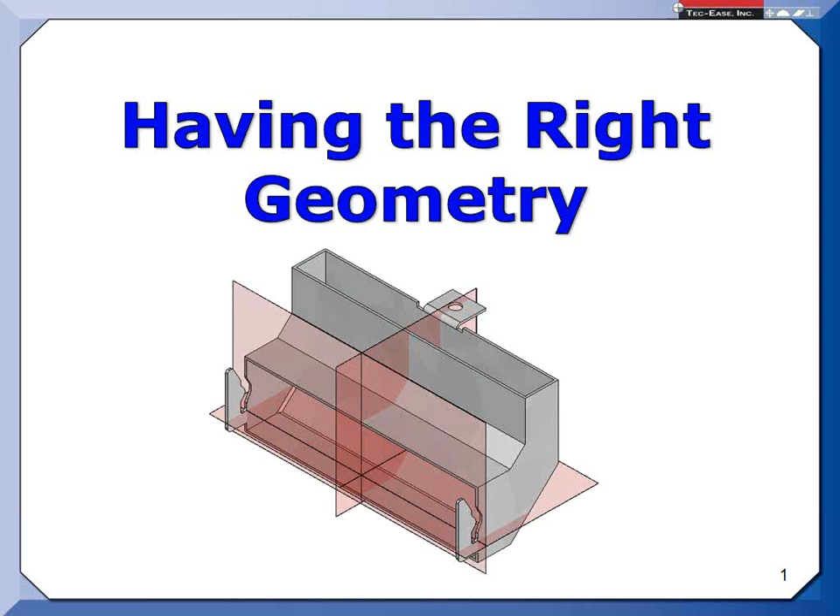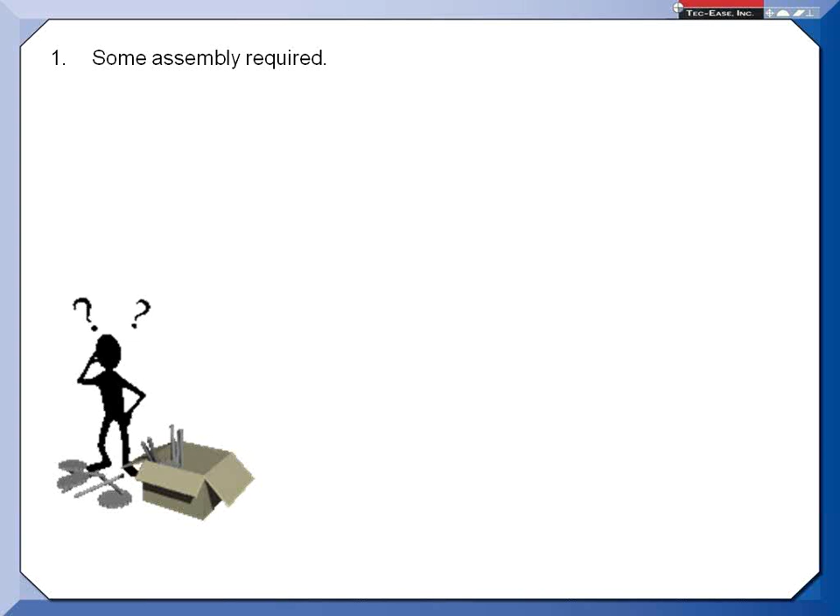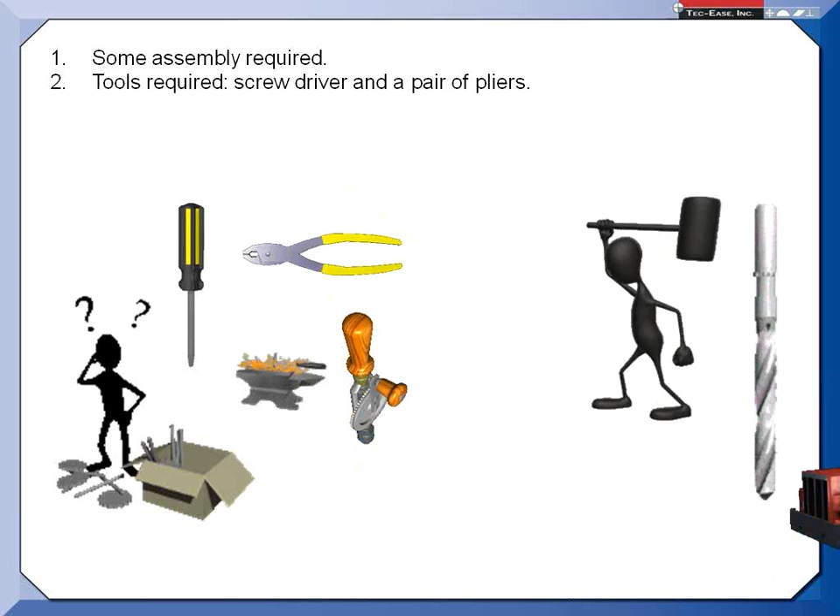Whenever I think about having the right geometry, I think about those things that I buy that come in a flat box and they have those lies on the outside. You might be familiar with those. The lie number one is usually some assembly required. And when I see that, I know there's going to be a whole lot of assembly. And then it'll often say tools required, something like a screwdriver and a pair of pliers. And that's fine, but they fail to mention that you're also going to need a hammer and a drill and maybe a bigger hammer and drift pin and maybe a bigger drill and, I don't know, a cement mixer. They leave out some of the tools you may need to put it together.

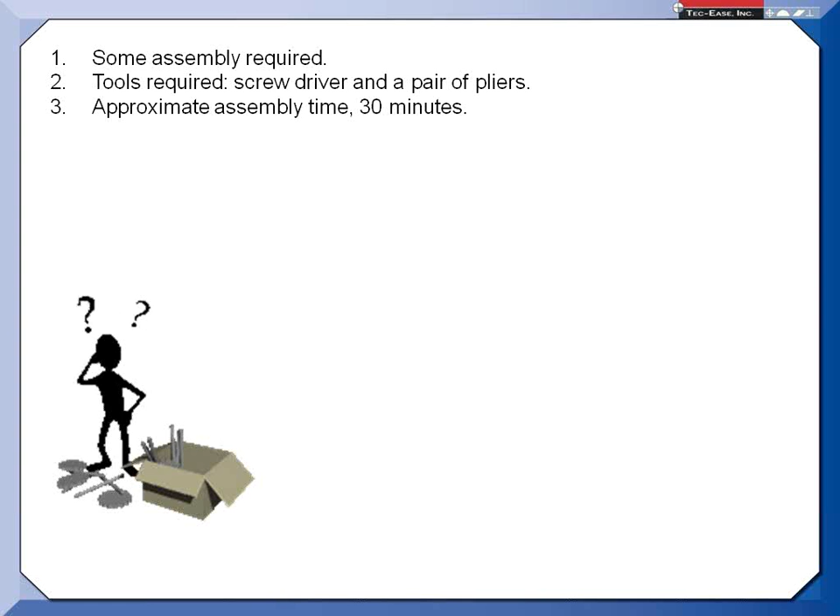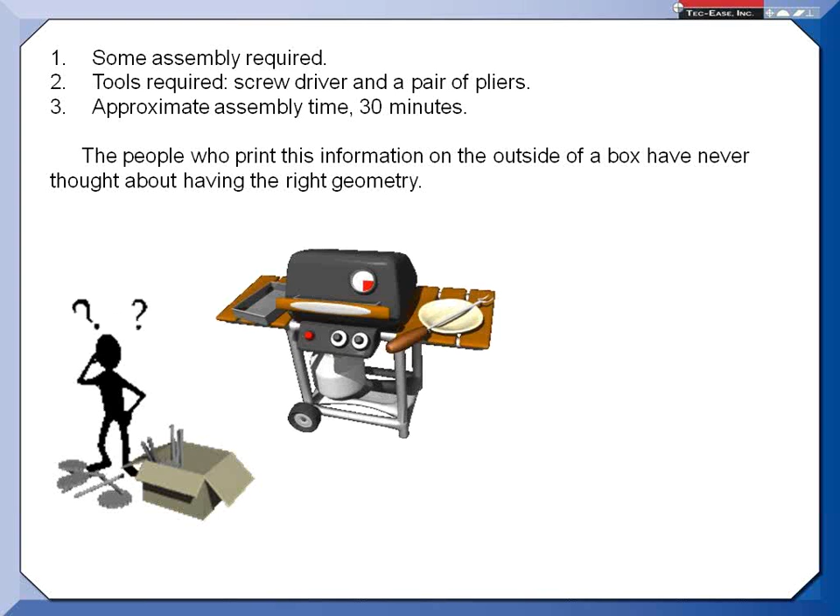And then they say approximate assembly time, 30 minutes. I can remember being suckered in on that with a kitchen set one Christmas Eve for my daughter. I started putting it together at about 11:30 at night, thinking midnight, I'm in bed, being an engineer and all. Well, the next morning, after spending several hours through the night, I had to say, oh, honey, look, Santa didn't have time to finish putting it together, so Daddy will have to do it today. I firmly believe that the people who print this information and design these things have never thought about having the right geometry. If you've ever dealt with putting together a gas grill, any sort of exercise equipment, you know what I'm talking about.

Then there's an instruction when you open up the manual, and the instruction says, do not tighten any fastener until fully assembled. The trouble is, many times, once it's fully assembled, you can't get at a lot of the fasteners to tighten them. I just went through this with a workbench. It had a drawer, and the track for the drawer was bolted onto the sides of the workbench. And the instructions said to close the drawer and line it up so you had a nice uniform gap all the way around the drawer, and then tighten the screws for the track. Well, when the drawer is closed, so you can get that nice alignment, you cannot get to the nuts that go on the ends of the screws. So you may have experienced something like that.

And I just want to say that there's been a lot of emphasis over the years on using maximum material condition on things like holes that are for assembly. And that's good. It makes it better for production. But oftentimes, in order to put everything together, you have to follow this instruction. You have to leave things loose and float them around to get everything to locate.

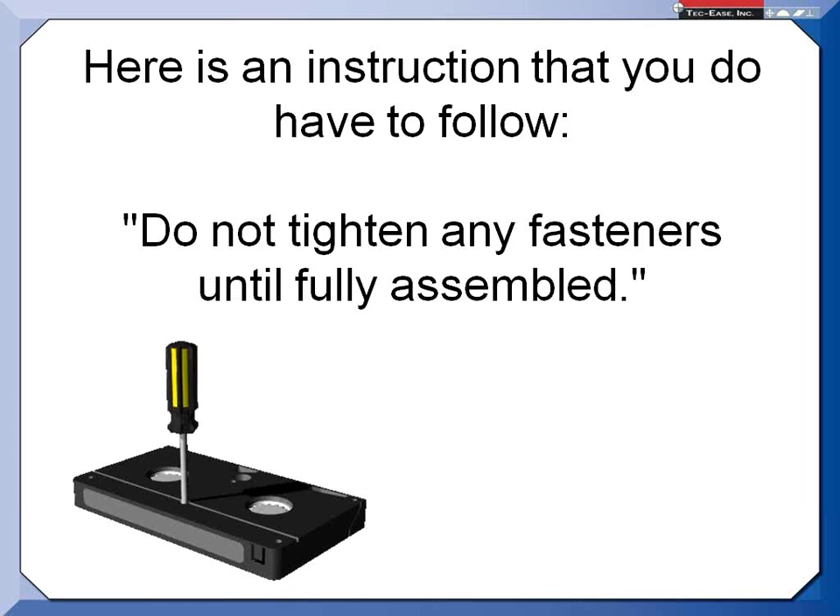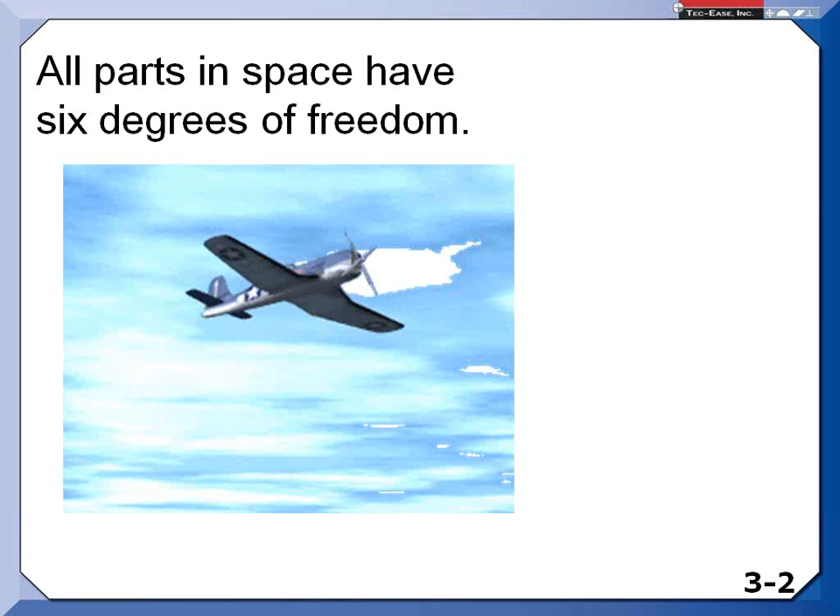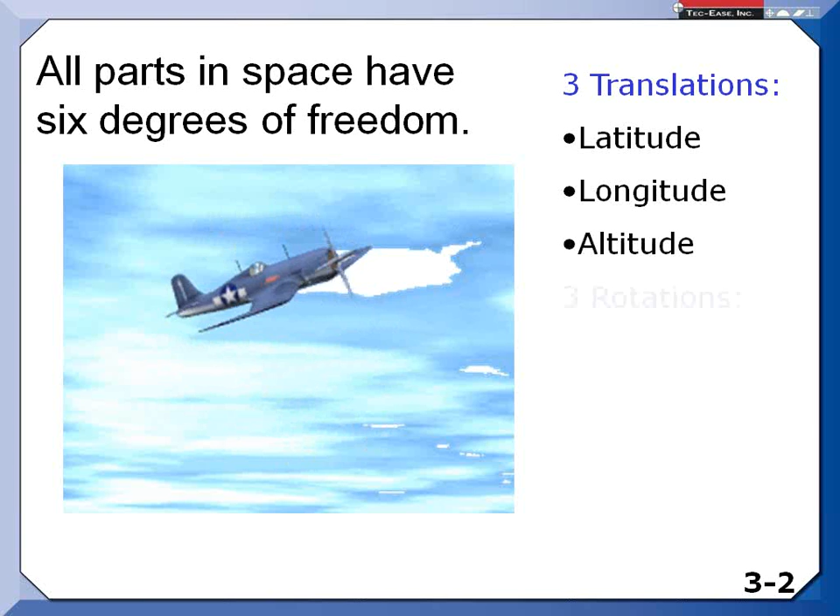Now, from your fundamentals training, I hope everybody knows that all parts in space have 6 degrees of freedom, whether we're talking about an airplane or some machine part or molded part. We have the 3 translations, or I'd say they're the 3 tudes: the latitude, longitude, and altitude. Those are our 3 translations to find out where that plane is. And then you have 3 more tudes. They're the attitudes, and those would be pitch, roll, and yaw.

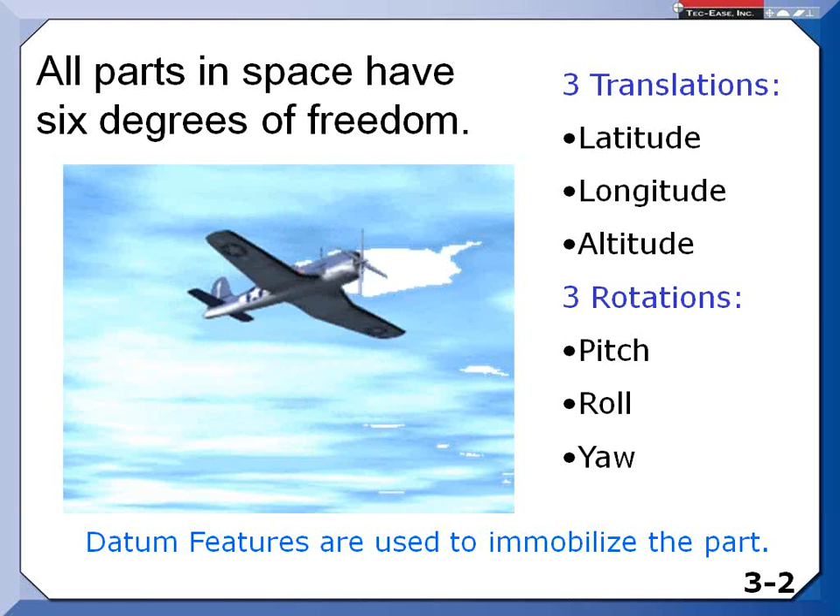Well, on a part, we use our datum features to immobilize the part, partially or totally, so that we can inspect it. And so that's what I want to talk about today: how do we immobilize the part? How can we do it with what's known as exact constraint? If you can fully immobilize your part on the 3 axes, so you've taken away the X, Y, and Z translations and the 3 rotations about those axes, that is known as exact constraint.

Many times when I'll look at a design, I'll say, what locates this part on the mating part? And people will tell me that it's going to hit here, here, here, here, here, and here. And I say, whoa, wait a minute. You're expecting it to hit in too many places. That's not going to happen. You're trying to get over constraint. And if you're dealing with a real flexible part, over constraint isn't always a bad thing.

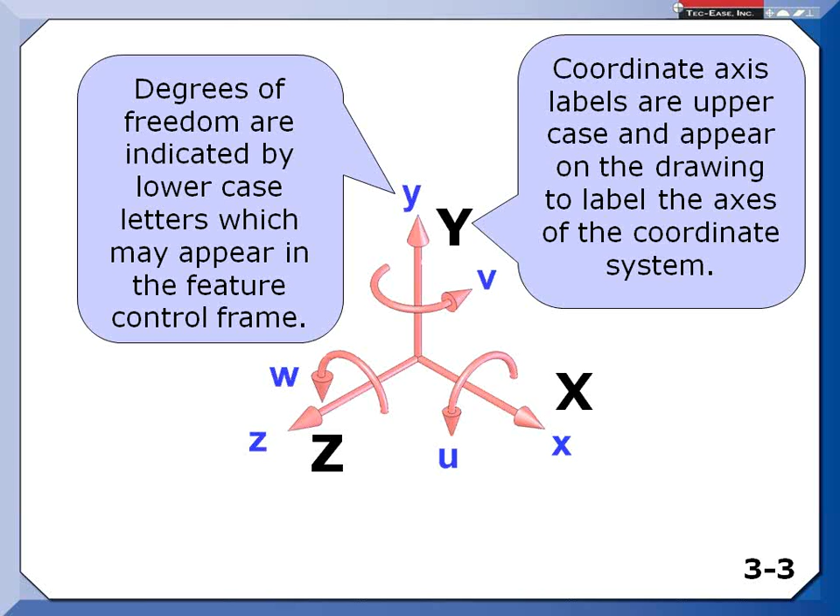But on the more rigid parts, if you try to get over constraint, you might end up pulling the machine apart. I know there was a company that was building copiers, and they had over constraint; when they ended up tightening up the bolts that held the main engine, they called it, in the copier, they were actually trying to rip the thing apart. So if we can constrain or arrest all of these degrees of freedom, then we get this thing called exact constraint.

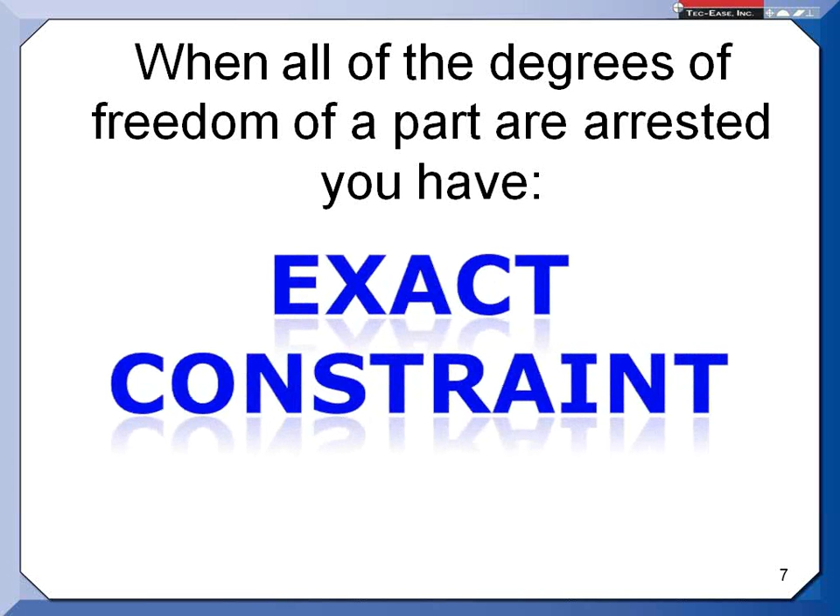Now, when I look for guidance in the Y14.5 standard, I look under the section with datums. The standard doesn't have a lot of application, but in this section they tell us how we should pick datum features. But I get a little confused by the guidance that they give there. The standard says that functional relationships to the toleranced features and the requirements of the design should be taken into consideration. Well, that's cool. I'm good with that.

But then it says to ensure proper assembly, corresponding interfacing features of mating parts should be selected as datum features. Well, there's a whole lot of parts that mate that shouldn't have datum features where they mate. You may have some frame, and then you have a lot of other little components or parts that mount to it. You don't necessarily have to create datum reference frameworks where each one of those little parts mounts.

I know there's some companies that do, but every time you set up a new datum reference frame, it is a new setup and inspection. Every inspection has error or uncertainty of measurement. So sometimes there's a better way. The standard goes on to say that you should be able to get to your datum features. They have to be accessible. I'd agree with that. They have to be of sufficient size to permit their use. Now, what is their use? Well, their use is to constrain some degrees of freedom. If they're too small, they can't do a good job of it.

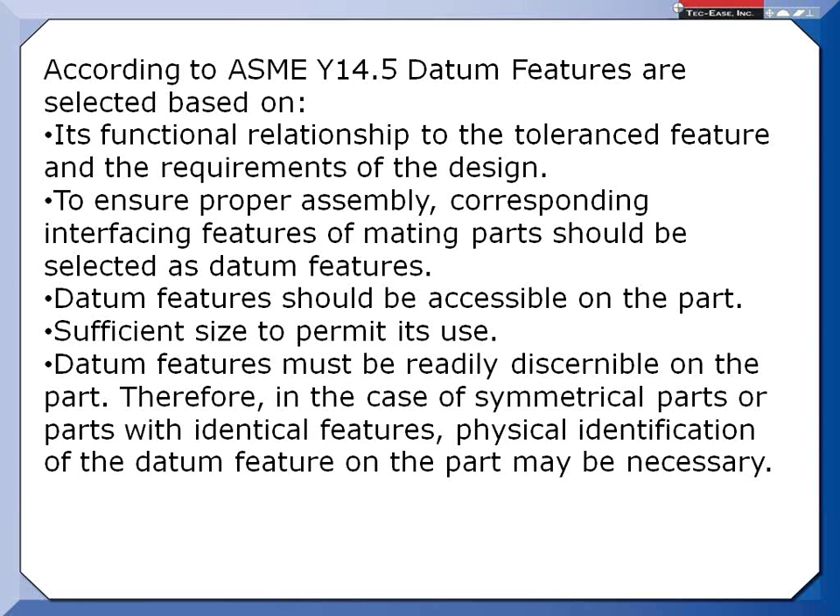Well, I'd like to show you a few case studies and how things were changed a little bit to do a better job. This is a case study of a cover. This cover is used to mount onto a casting, and there's flammable liquid underneath the cover in this area and this area.

So they had this position tolerance on the 8 holes, and it was a die-cast part. But they wanted the cover to align using these screws. So they had the 8 screws going in there in assembly, and they had a dedicated machine to drill and ream these holes. Now, the problem down at assembly is they had to start all 8 holes and then go back and tighten them. If they drove a screw right away, the cover might have been shifted off so you couldn't get some other screw in there.

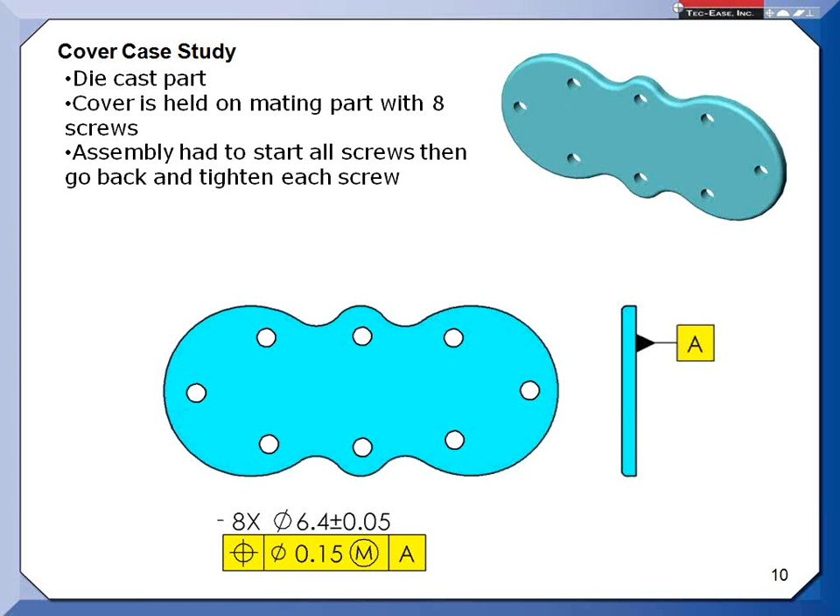So here's that instruction, once again, that we find in that manual. Do not tighten until fully assembled, then go back and tighten. So the holes were drilled and reamed on a dedicated machine. My goal was to get rid of that dedicated machine. They wanted the holes to do a good job of locating the cover. And I asked the designer, which of the holes here does the locating of the cover? And he said all of them. That's why we drill them and ream them.

Now, if you're worried about a shear load, if this was a brake pad and you had 6 or 8 rivets and you're worried about shear load, yeah, you'd have to really hold the location tight so they all carry the shear load at the same time. But many times, as with this cover, those screws were just there to clamp once the thing was aligned.

Now, keep in mind, if I put position tolerance on those holes, from part to part to part, those holes are moving all over the place. If I ask really what holes are going to locate this cover, it's whichever 2 are the farthest out of location. They're the ones that will hit the screws first, and then hopefully the rest will clear.

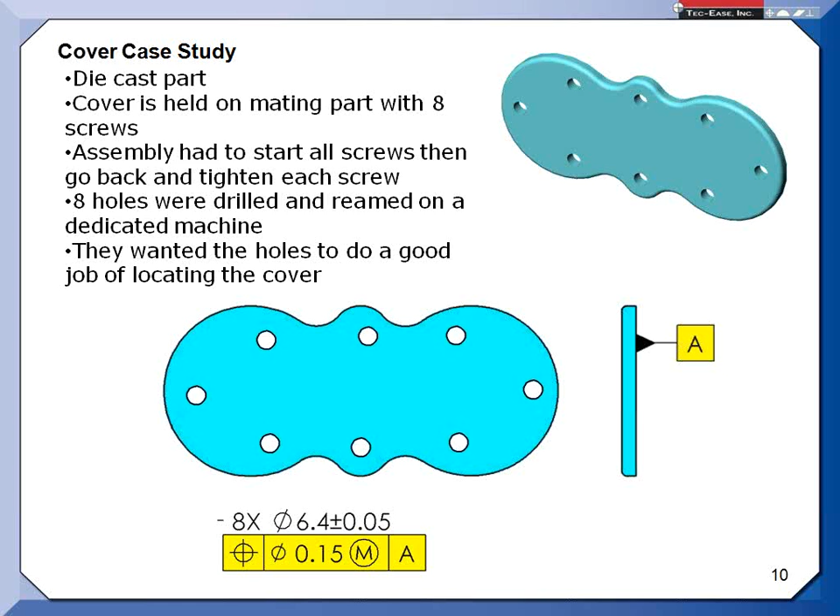If I were to ask you, which of the holes on this cover would you like to use to locate it, what would you tell me? Probably the 2 horizontal, farthest left, farthest right. Yeah, the ones that are the farthest away is usually what people say. But even if I put position tolerance on those 2 holes, they're moving around. And so I have to open up these holes bigger than I'd like to because of the position tolerance in order to make sure I can get the screws through there.

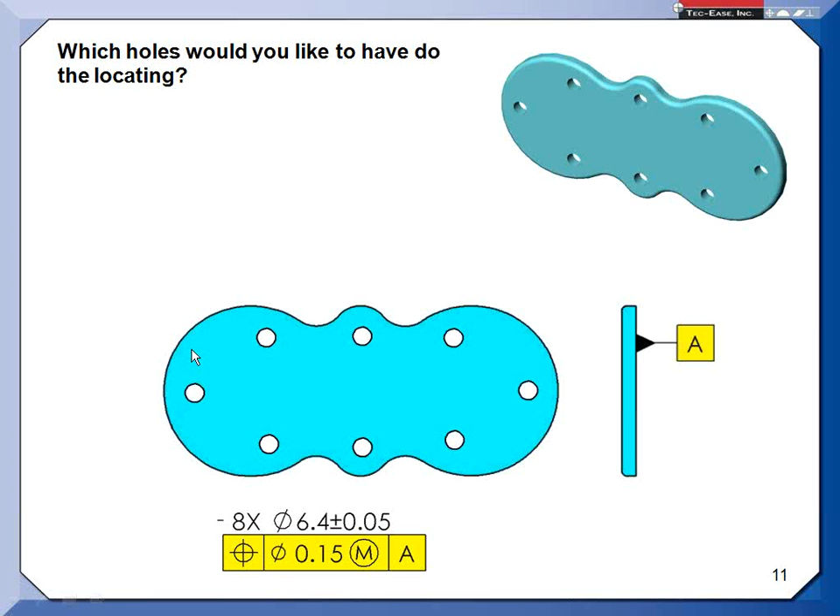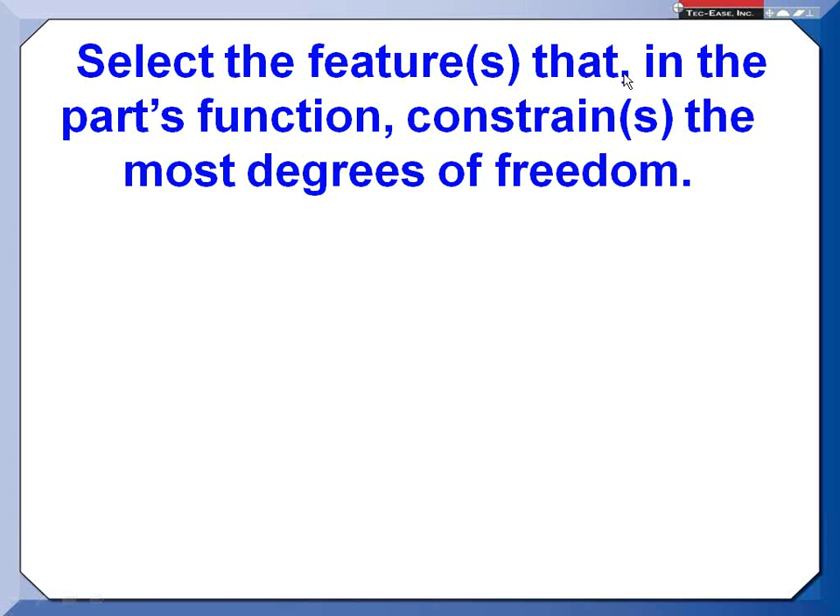So I talked to tooling, and I asked them how well they could hold the size of the holes. And I also asked them a little bit about other things like orientation of the holes. What I like to say is when you're selecting your datum features, you should select the features that in the part's function constrain the most degrees of freedom. If you do this, you'll end up with less variation in your assembly, and so that's the approach I took on this cover.

Something to keep in mind is I don't care what process you study. If you look at the 4 major characteristics, location, orientation, size, and form, the one that requires the most tolerance is location. The one that requires the least tolerance in your manufacturing process is form. Let's think about it for a machining process, for instance. The form comes mainly from your speeds and feeds, perhaps in like a milling operation. When you go to the size, that often depends on the size of your tool and your speeds and feeds. So you're getting a little more involved there.

By the time you get to orientation, that's how well you squared up the column on your mill and your bed and the travel and all that. So you're getting into that, and you're also getting into the speeds and feeds in the tool. It's all part of that. And when we talk about where a feature is that you're creating in that process, now you're into all the dynamics of the machine. So study after study tells us the most difficult thing to control in a process is location, followed by orientation, then size and form.

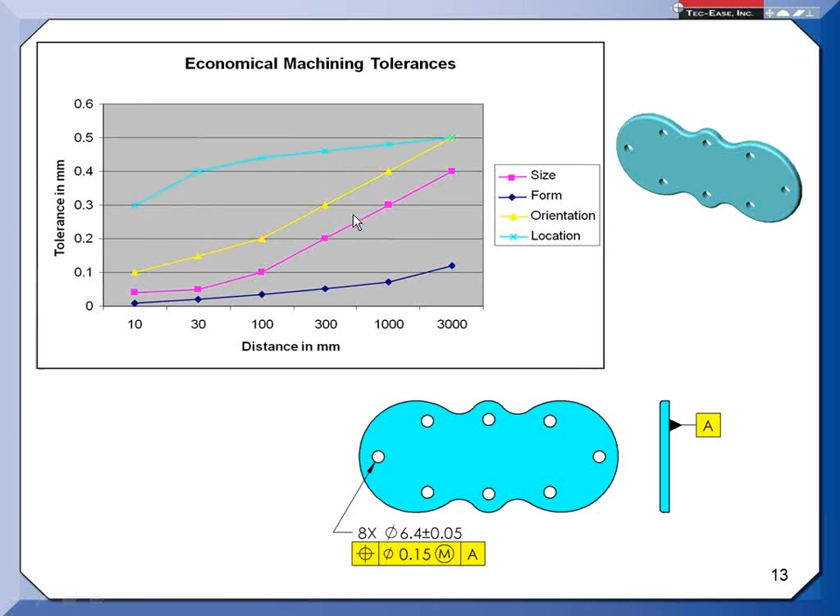So keeping this in mind, if I can somehow take position out of the equation when I'm locating the part using these features, I could use tighter tolerances for orientation and size. So what I did is I recommended that they make one of the holes a smaller hole close to the size of the screw, and a slot at this end. Now the length of the slot was calculated so it never peeks out from underneath the head, so the customer won't know there's a slot there.

But what this did is it takes that variation in position out of the equation. Instead of both holes trying to locate this part, only the one on the left is going to control the location. And then if I were to ask you, what is the relationship of this hole to the plane established by datum feature A, what would you tell me? Is it location, orientation, size, or form?

Michael, you were right. It's hard to get response when you're doing a webinar. Yes. Ask the question again, Don. Sure.

Orientation. There it is, orientation. My question was, what is the relationship that I need to control between this hole and the plane established by A? And the answer isn't where it is, because it's going to become my datum feature B. It's going to become my origin of measurement. So the relationship is just orientation, in this case, perpendicularity. And so I can hold that perpendicularity very tight and still not add cost to the part. You kind of get it for free with your process.

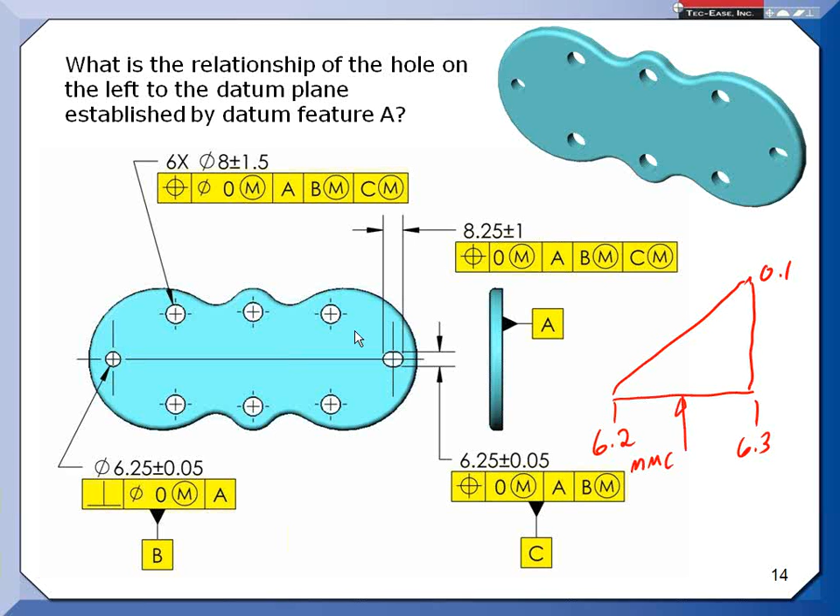I will say sometimes people say, oh, a slot costs more. Well, if it's in a CNC machining center, it's called a G01 code, which is a linear move to create a slot. And in sheet metal, in castings, in molded parts, it's free. You're not going to pay extra at all.

So at the end, what we accomplished was we were able to use these parts as cast. I got rid of that dedicated drilling and reaming machine, and we're actually locating the part better as cast. Tremendous savings in cost on the part.

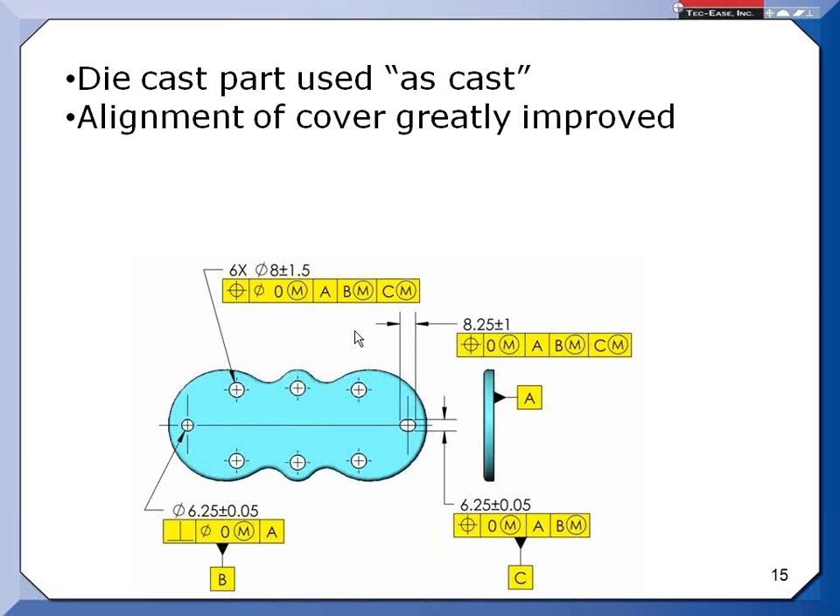Also, the alignment of the cover was greatly improved, and assembly was able to put the screw into datum feature B first, then into datum feature C, and then we just came out with some order of putting the screws in that made sense, but as soon as they put the screws in, they could drive them home. No more leaving everything loose and then going back and driving the screws.

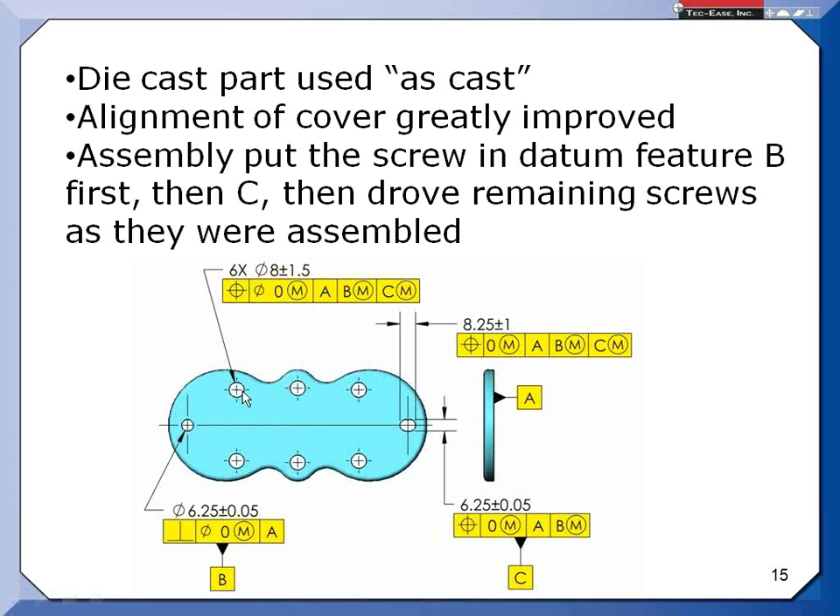Any question or comment? No, it makes absolute sense. Sorry? No, I was saying no, it makes absolute sense.

Oh, good. Okay. Now, we've got a company up here in the Rochester area that makes copiers. I'll just call them Company X. But what I found when I started working with them is this is their culture. When they're using stamped parts and molded plastic parts and cast parts, wherever they can, they try to use a couple of semi-perfs. So these are perforated but not all the way through, so you get a little boss on the bottom of this sheet metal part going into a hole and a slot.

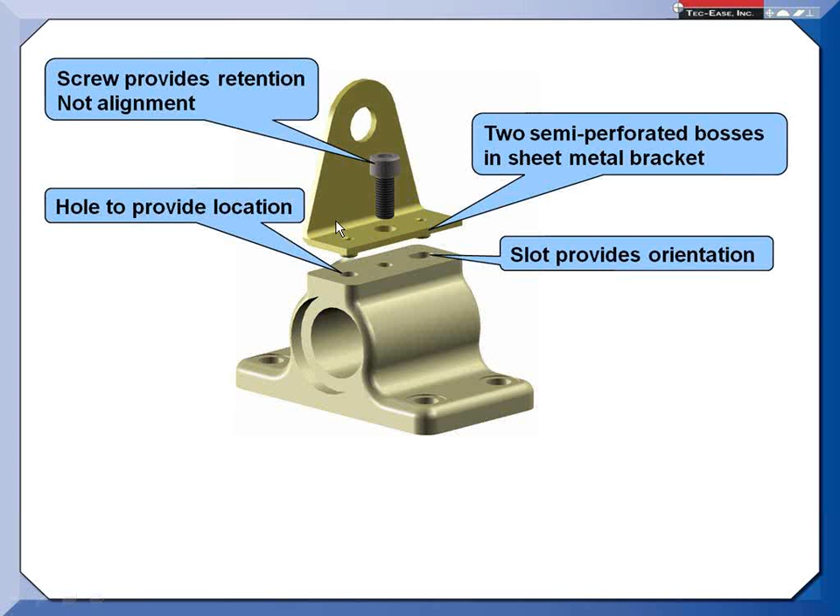And then if you're using a screw, it's just there to hold it in place, one screw to clamp. I go to a lot of places where what they would do is they'd have two holes here and two screws trying to hold this thing on there, and you wouldn't locate it as well.

So let me give you another example where I've used this. This is a blower motor. Well, it's not the whole motor. I don't have the shaft in here, but this is the housing and this is the end cap. And originally, they held it together with these toy tabs. So if you see the little tabs right there, they get bent over to hold the two parts together.

And they were also using those toy tabs to locate these two parts. So the end cap is over here on the right, has little toy tabs in it, you can see. And then the housing had these square holes that the toy tabs went into. And once again, because of positional variation, they didn't do a great job of aligning. And I said to them, you know, what features align the cover to the housing? And they said, well, these 4 tabs. And I'm going, oh my goodness, okay.

Now, the problem wasn't that it couldn't go together and work. It did go together, but you'd get some shift in this part relative to that. And it still worked because the bearings that they had down here and down there that the armature shaft rode on were self-aligning. They were pretty clever about that. So these were free to rock around to line up to the shaft.

The trouble was the misalignment could sometimes be so great that you didn't get a nice uniform air gap between the magnet and the armature. And if you don't have a uniform air gap, you don't get as much power out of this motor that you were looking for. So they really needed to align these parts better to one another.

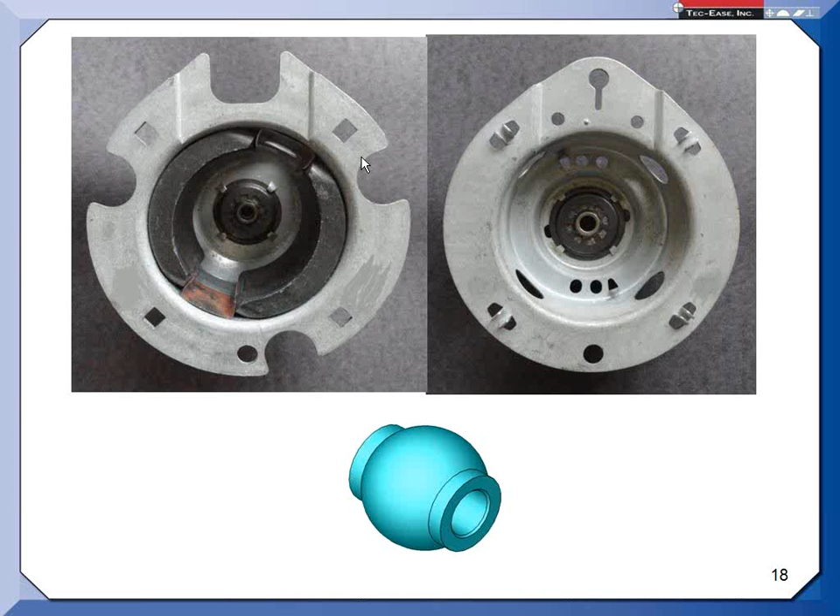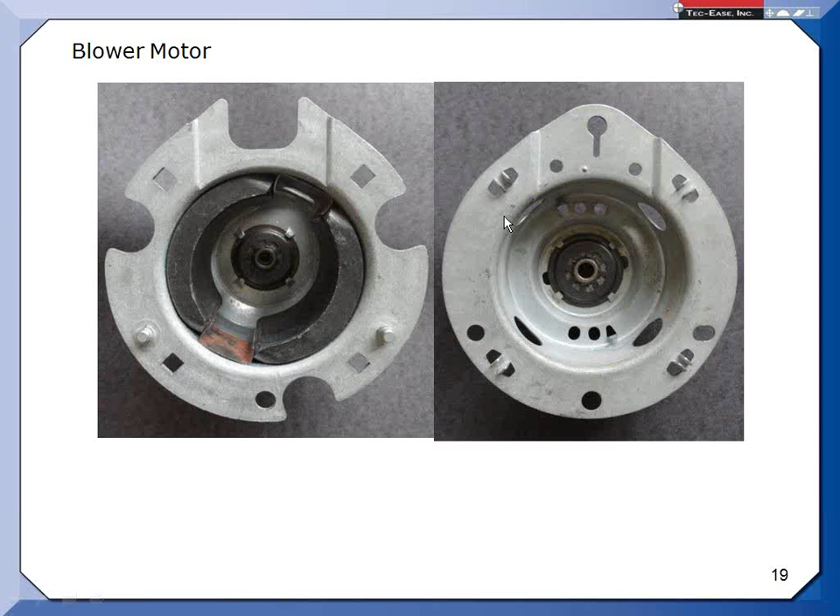The solution was to add a couple of semi-perfs here, right in the existing tool, and to add a hole and a slot once again here. So they did a very accurate job of locating, and then the toy tabs were used, bent over to hold the whole thing together. Now I don't want to give the impression that this is the only way to do it with this hole and slot and semi-perfs. Here's a little scheme, and then I'll show you a place where we've used it. But I'm getting exact constraint once again.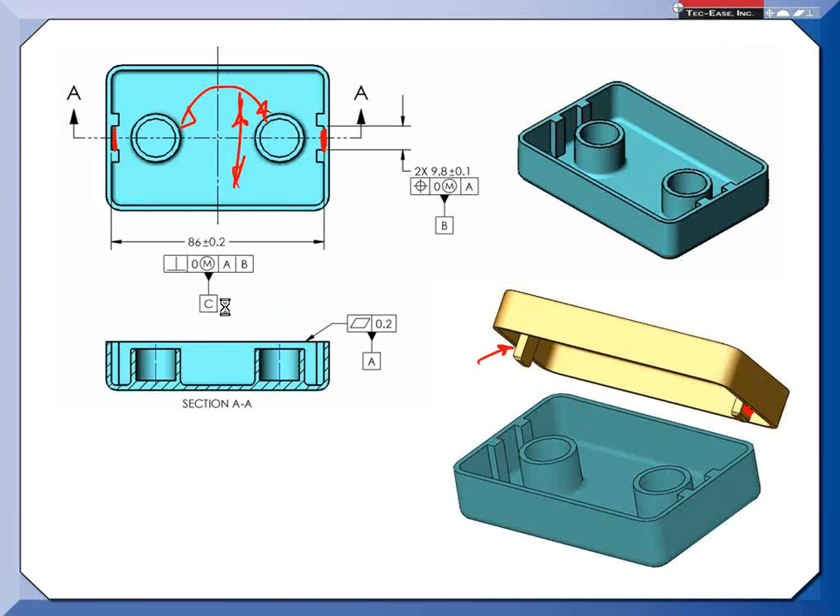Did the same thing on this cover. There's A, and I put flatness on it. And then B would be the two tabs, the width of the two tabs. That's taking away 2 degrees of freedom. And then C is taking away the one remaining degree of freedom.

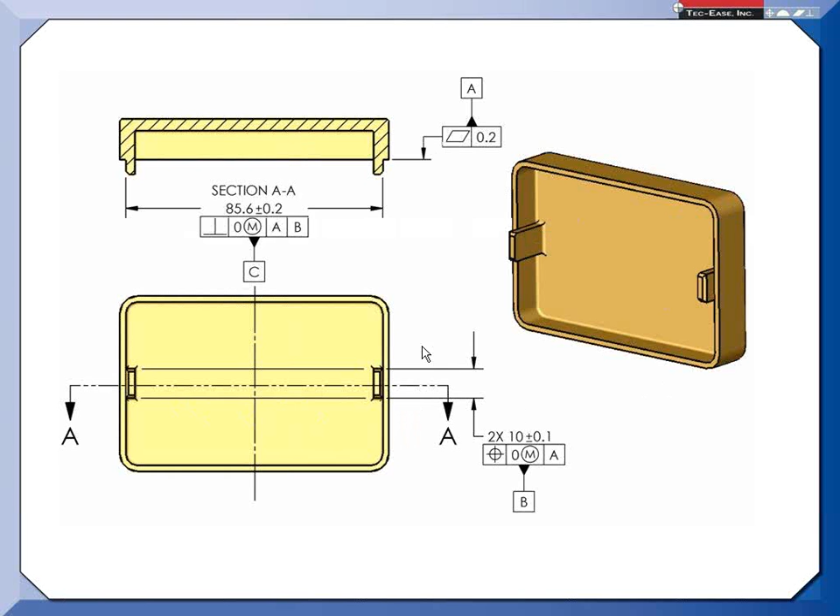Now, this was kind of a simplified example to illustrate what's going on here. But if you looked at the brown bag on customizing your datum reference framework, you might remember this one. This was a back for a cell phone. And the primary datum feature wants to be this little saddle shape here.

And if I didn't customize the datum reference framework, the only degree of freedom that that little saddle shape wouldn't take away would be movement in and out of the screen in this view, or up here in this view, movement along the y-axis. However, it wouldn't do a very good job of stopping rotation. Because it's so shallow, it doesn't do a good job of stopping that rotation about the z-axis. You see your z-axis here, and in this view, z is coming out at you. That rotation is known as W when we label our degrees of freedom.

So what the designers wanted to do is do a better job of stopping that rotation as well as stopping the movement in the y direction. So you'll notice they added some little tabs here. And those tabs, just like the ones we saw in the last example, go down into a couple of slots in the mating part. And those two tabs together are datum feature B.

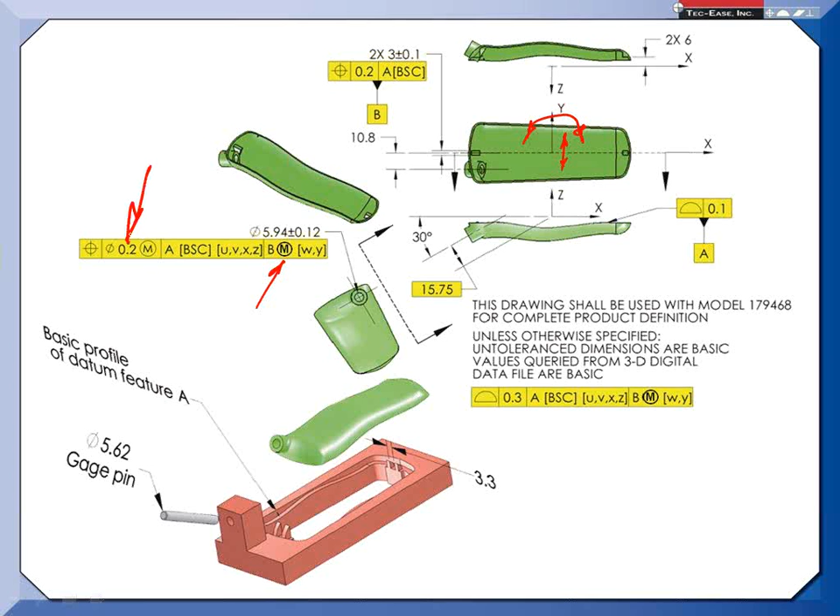And you're right, a lot of people don't know how to deal with that, and so what they'll do is they'll measure the size of B, and then they will try to add that into the position tolerance as some sort of a bonus, and that's just flat out wrong. Because just because those little tabs get a little more narrow doesn't mean that the hole here for the antenna is going to be able to move up and down more. That just isn't going to happen.

So real good point, but you've got to have the right software to do it. Not easy. But these are complex parts too. So we can't do it with our old gauge pins and angle plates and a height gauge. So good point. Any other comments?

Okay, I'll take you through a couple more case studies here. I don't know, I wasn't watching the time very well. How are we doing? Oh, we've got time for these. This is good. Hope everybody's got their sandwich there.

This is what they call a wiper bridge. It goes onto a windshield wiper. You're all familiar with a windshield wiper arm. And there's a little spring clip that goes in here, and this little pin passes through these two holes. But what I want to talk about is how this wiper bridge gets attached to the frame of the windshield wiper. It's riveted in place. Notice, though, that you have to go through 4 bends to get from one end of this part to the other.

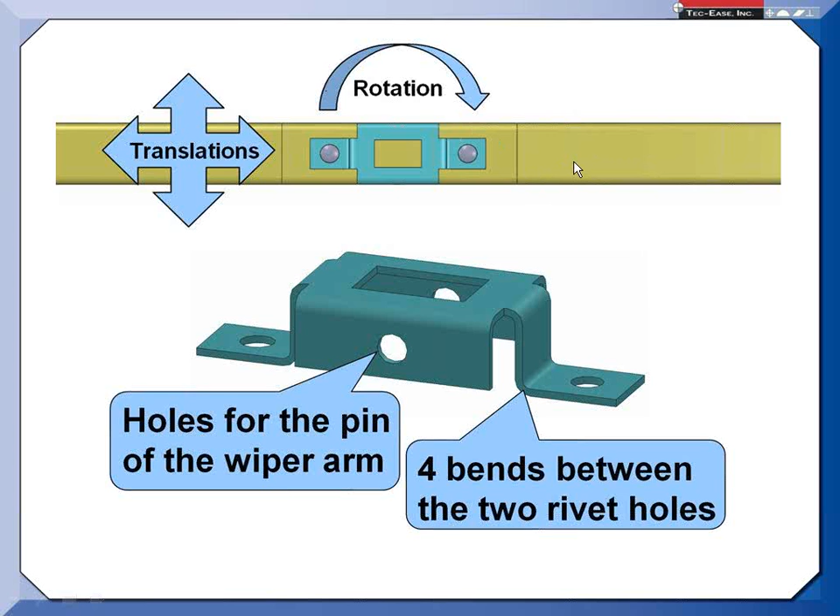Because of those 4 bends, they can open up and close, and they had a hard time controlling the distance between these holes. In fact, if they hadn't added a secondary operation, they'd have had to open these holes up quite a bit to be able to get the rivets in there. The result is that this bridge can rotate quite a bit relative to the frame of the wiper, and that throws off the attack angle of the wiper blade on your windshield. So that's not a good thing. You get smudging and skittering.

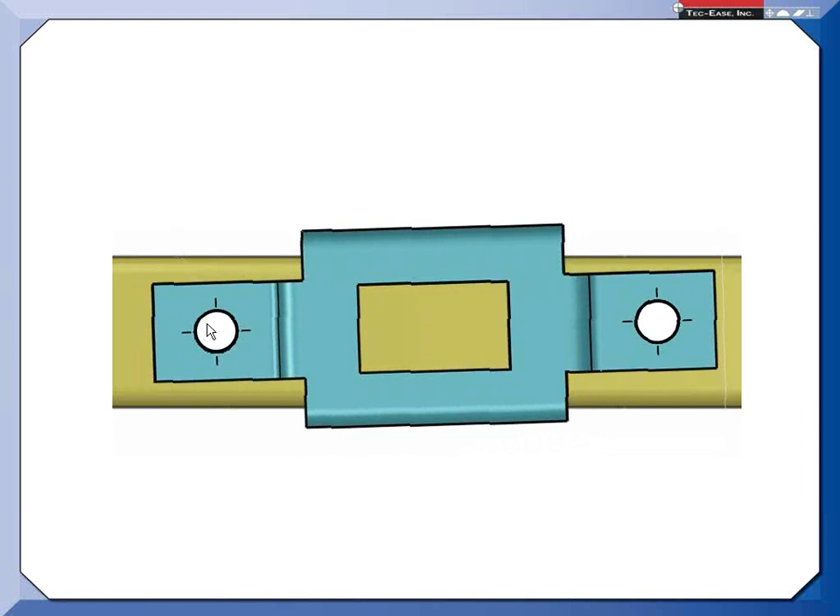So just imagine as these 4 bends open and close, I'm going to get large positional variation between these 2 holes. Another great candidate for a hole and a slot, and that's exactly what we did. If I just open up the holes, then I've got this problem, because I'd have to open up the holes to accommodate those 4 bends. So I can go to a secondary operation, and that's what they did till I got involved: they'd make these up, then punch the holes later, and they could hold the position tighter.

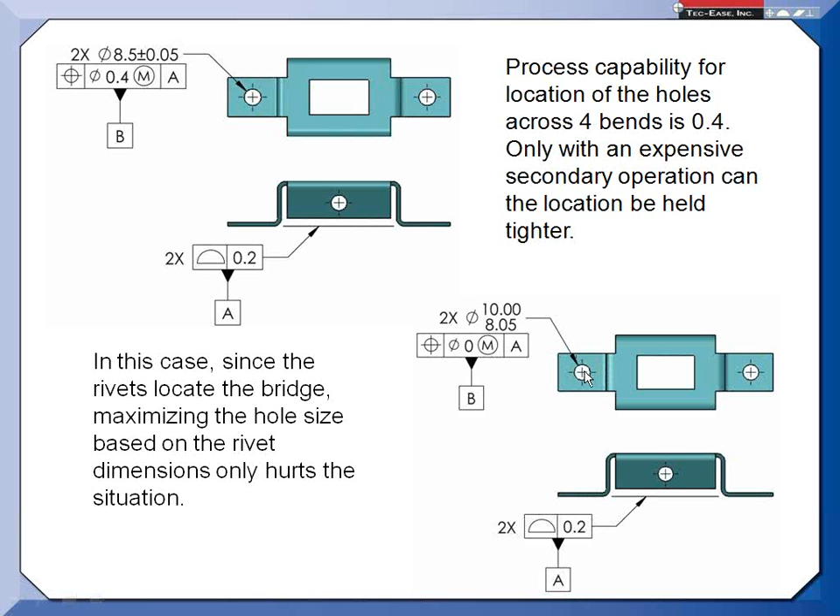With a secondary operation. Another thing they wanted to do was to open the holes up a bit, but they really couldn't. With the rivet and the head of the rivet, they could open them up, but then it would give you that rotation problem. So the solution was make this hole close to the size of the rivet.

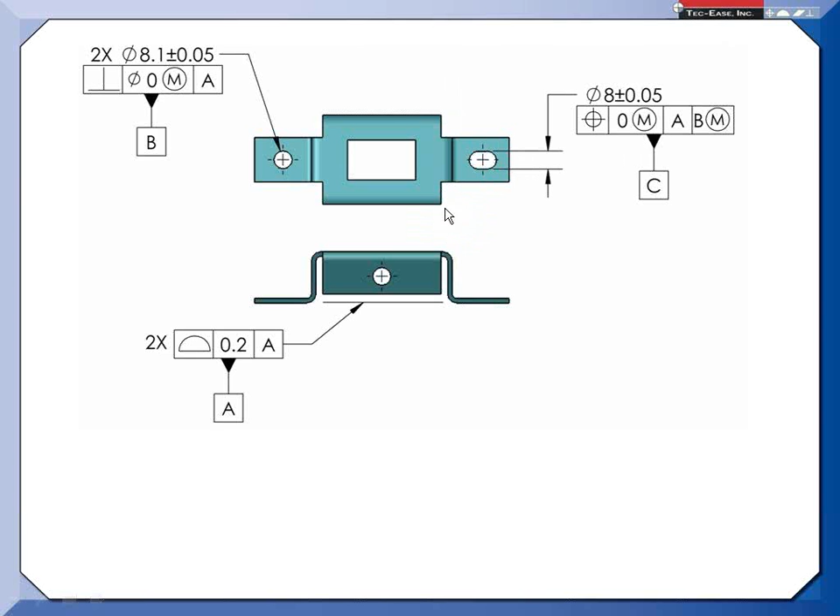This perpendicularity probably could have been left off because we're talking about a hole in sheet metal. You're never going to blow that. But to be complete, I've shown it here. No problem holding 0 on perpendicularity on this. And then the slot. So now as this opens and closes, it's not going to affect the rotation of this on the wiper. So we can do a much better job of aligning it.

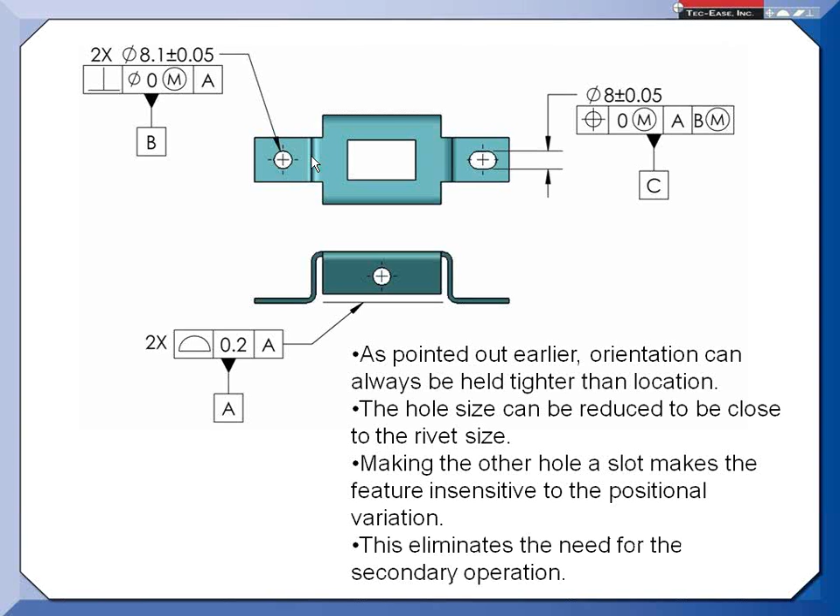So we brought these both down close to the rivet size, the width of the slot in that hole. And it eliminated that secondary operation, saved them a bunch of money.

Okay, here's another one. This is called a chimney, although it's kind of a reverse chimney. It goes on a gas cooktop stove, and the purpose of it is to get air down to your burner. They had 4 holes here, and those 4 holes were for 4 screws to hold it in place.

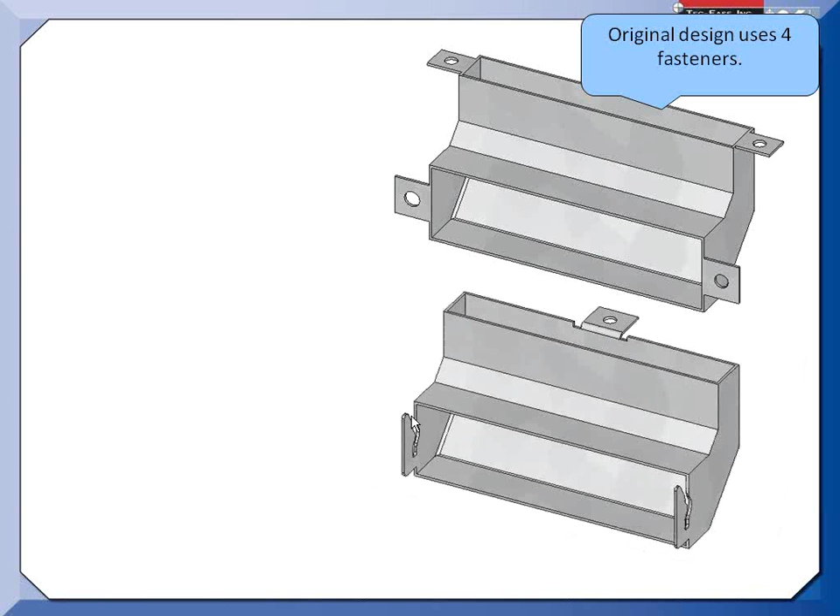Here's the redesign. In the redesign, we only have 1 hole for 1 screw because we created alignment features for exact constraint. So in the original design, here's your chimney again. This is what it looks like. It gets screwed here into the kind of the lower pan of your cooktop gas stove.

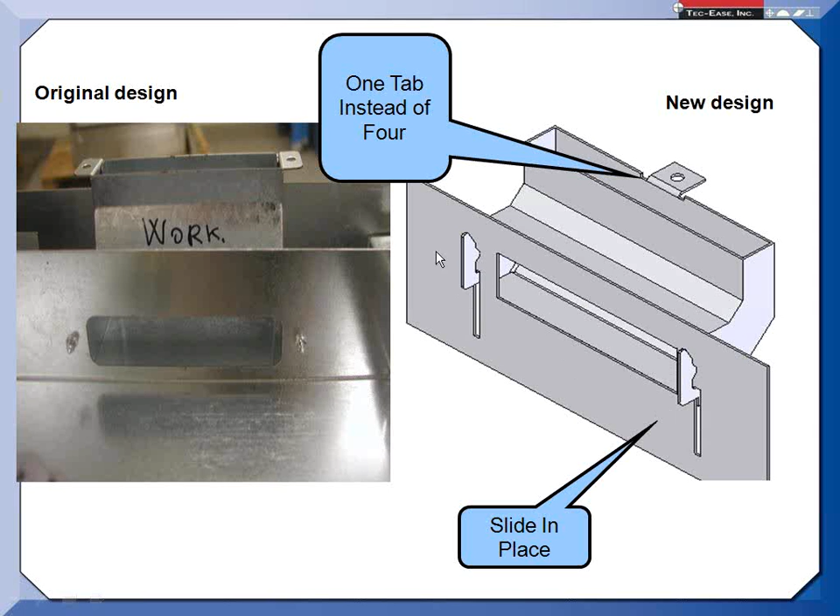And they had to leave the screws loose so they could kind of rock this thing around and get the screws into those holes when everything was assembled, and it was a chore for them to reach up in there and tighten these screws once it was assembled. By changing to this design, it was much, much easier to assemble. You just slide the part in place. These are your alignment features, and the 1 screw holds it there.

So here you can kind of see what the assembly would look like. The result, we reduced the number of parts that saved money. With these alignment features, you didn't have to leave things loose and then fiddle-de-fool around later when you were tightening the screws. And then these alignment features became the datum features on the part.

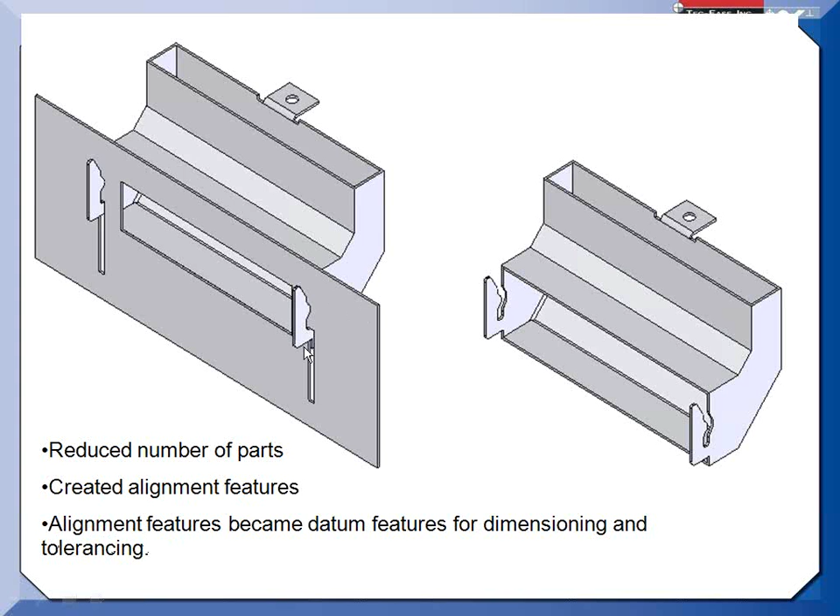So I've got a little animation here to show you how this goes into the assembly. So you kind of slide down on there, and here's the screw holding it in place. So what's taking away the most degrees of freedom here is actually this irregular feature of size. It's not a regular feature of size because I don't have opposed points for this 0.8 millimeter dimension, but it's what we call an irregular feature of size. And it's actually 2 of them. There's one here and there's one there.

So I can tie them together with a new symbol that we have in the 2009 standard, and that's called the continuous feature symbol, the CF. So now it's saying treat these 2 as though they were 1 feature. And that 1 feature is going to be my datum feature A. And that'll establish a plane that'll constrain 3 degrees of freedom.

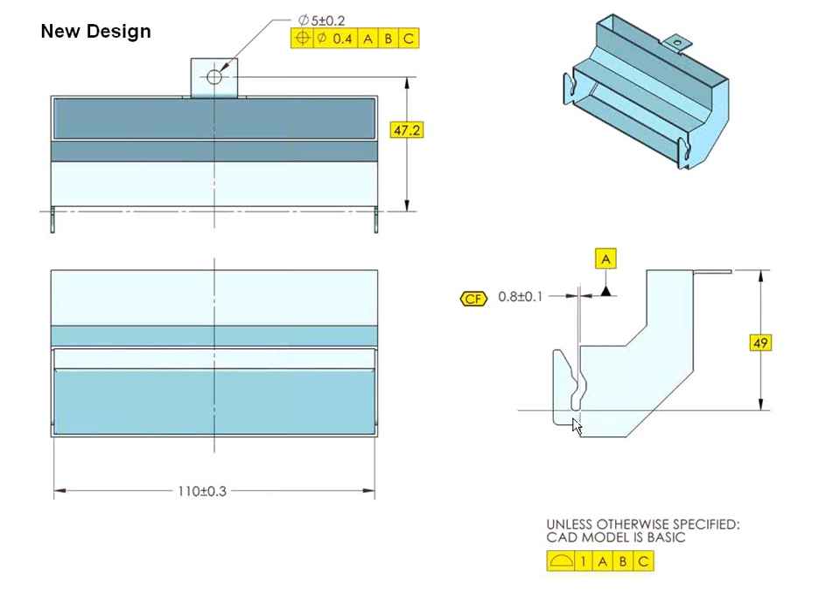Then as I slide up into those notches, I'm going to contact here and there. And so those 2 surfaces want to serve as my secondary datum feature. And I have to control them, so I have a profile on those. 2x, there's 2 of them, and they become my secondary datum feature. Now you might wonder why there isn't a 2x up here on A. Well, if you use the CF symbol, you're saying it's continuous and you're not supposed to put the quantity. But here, since I'm using profile, I do have to say how many surfaces are involved with that profile.

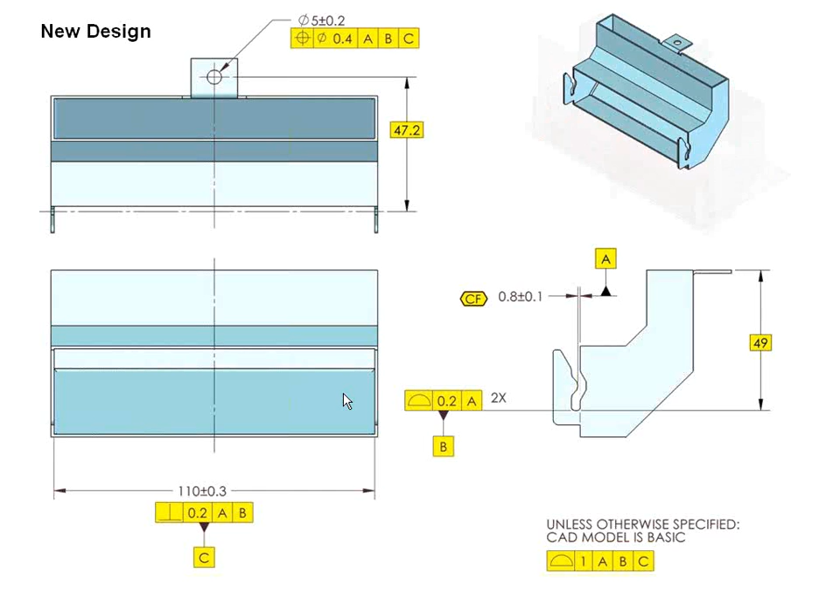And then lastly, the only thing this can do once I have B, because B will take away up, down, and it'll also stop rotation, is I have movement left to right. And so the inside here makes contact with the sides of the slot. And so there's my tertiary datum feature C. And its relationship back to A and B is perpendicularity, so that's what I put on it. So now I can control the rest of the part to ABC because I've created a datum reference frame here with those features, those alignment features.

And this is one of those reduced dimension drawings. It's saying go to your CAD model to get the dimensions. So you have to query it to find out what these other dimensions are. Then I have a general profile on it, and I've overridden that general profile with the size tolerance, with this profile, with this perpendicularity, and with this position up here on the hole for the screw. So I'm saying you can get a millimeter of tolerance on all these surfaces. However, I kind of care where that screw is. And so I've given you a size and a position on it.

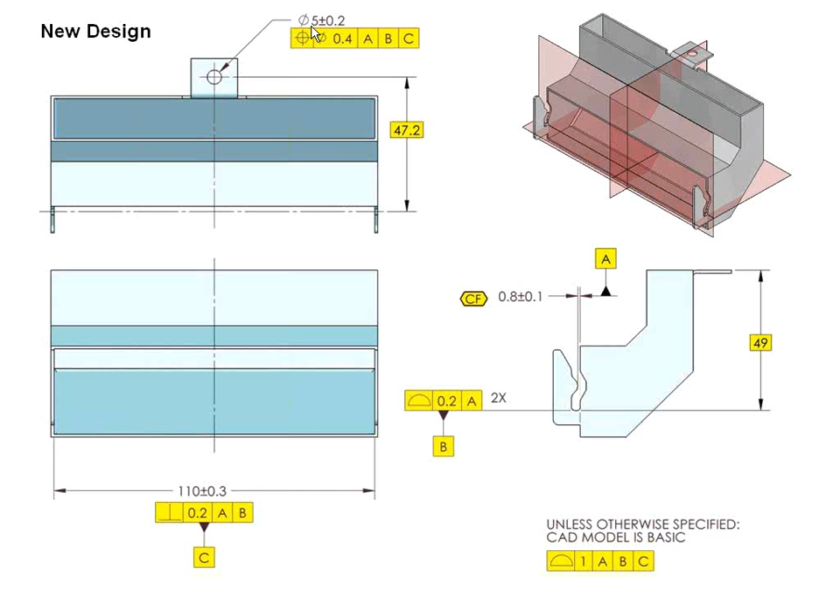So we start by making sure we have geometry whenever possible that'll do exact constraint, not over constraint, not under constraint, and there's lots of ways to do that. And then we make those features become our datum features for our geometric control. And that's what I meant by having the right geometry on your parts.

So we've got about 15 minutes left. Are there any questions about anything I said, or do you want to share some experiences you've had? Anybody?

If you've got a pattern of holes that you really do want to use the whole pattern and not just, say, pick two of the holes like you did in the first example and turn one into a hole and one a slot, or use one as a hole, one as a slot. And then you want to establish that as your B and C, or your secondary and tertiary datum features. How do you then define the axes associated with that?

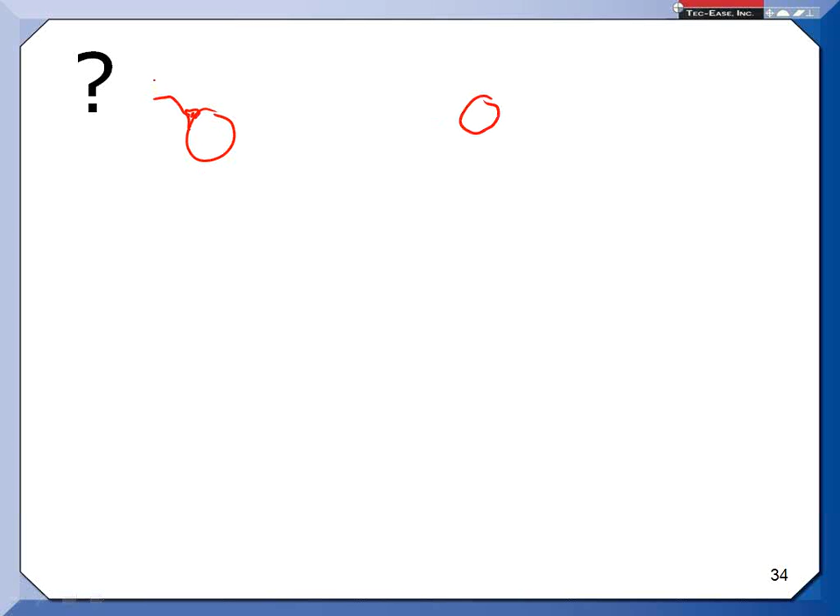Okay, excellent question. A couple different answers I can give you on that. If I have two holes here, and I call one of them out as B, and the other is C, that's what you're saying? And A is maybe some mounting surface? Yes. Okay. Well, following datum precedence, if we said A, B, C, A is going to take away 3 degrees of freedom, that first plane.

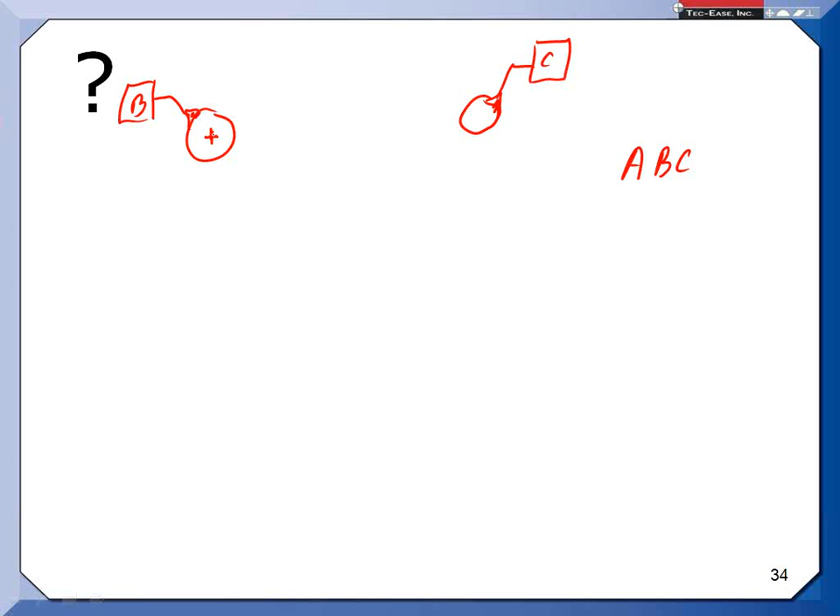Then B establishes an axis. And the standard tells us that that axis is the intersection of two planes. If you think back to geometry class, when two planes intersect, their intersection forms a line. Well, in this case, I've got a line here, an axis, and that's the intersection of two planes. But I don't know how to orient them until I get C.

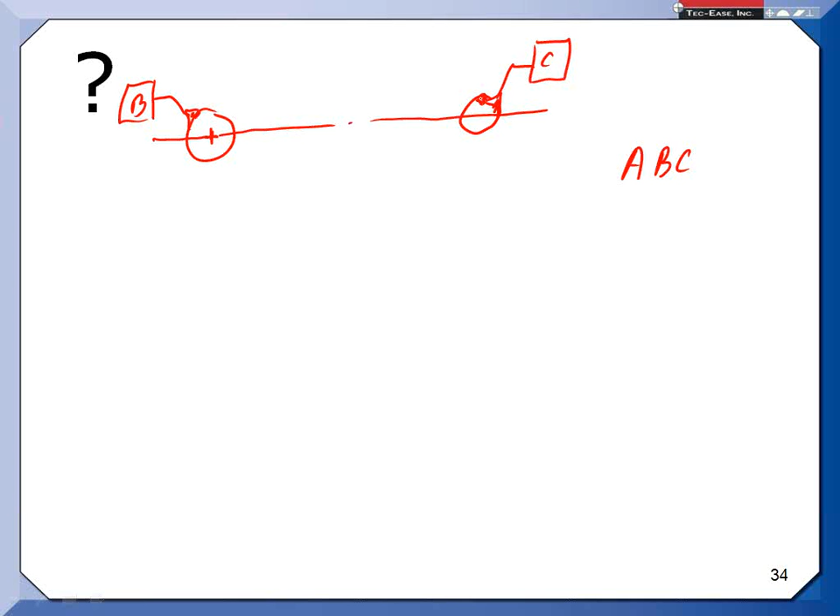So with C, one of the planes passes through C, and really you're hopefully just using kind of the top and bottom of C to orient that plane. And then the other plane is at right angles to that plane. So here's your 0, 0, 0 origin of measurement if you do it that way.

Now, what if you had... Oh, go ahead. Well, what if you had a pattern of 6 holes, and you wanted to use all 6 of them to establish your secondary and tertiary datums? Okay. So it's 6x, and I'll have a size plus minus something or other. I have to position them to control where they are to, let's say, A. Yes. Right, to control their relationship to one another. And then you want to call them out as B. That's technically okay to do.

A little warning, though. Let's say I then have this feature, and I want to control its position. And I say position to A, B. If I stop right there, B applies at what we now call a regardless of material boundary basis, which means I'm supposed to fill these holes somehow to trap the part, to take away the movement. The standard does not tell us how to do that. They're not all going to be exactly the same size. They're not all going to be in the exact position.

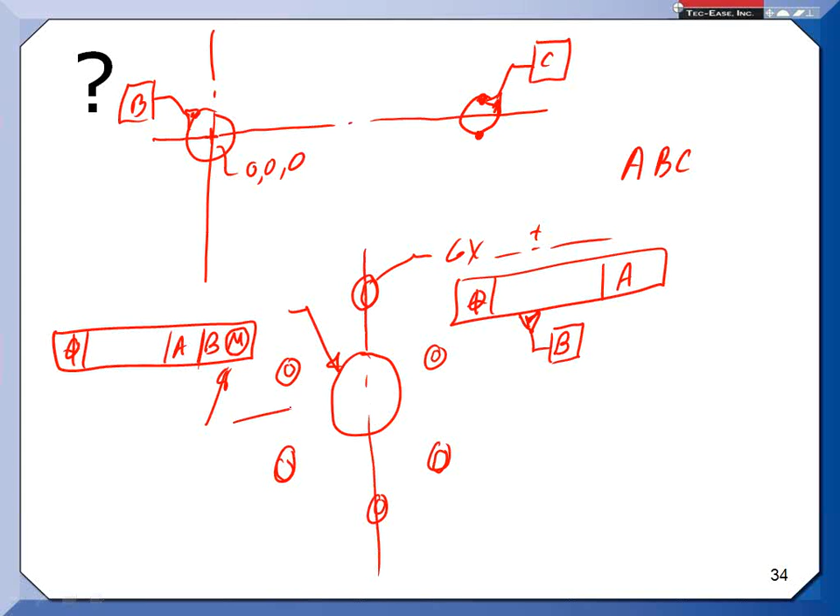Okay. Well, in your gauge itself, you could put it anywhere. I'd be tempted to say that your origin is kind of right down through the middle here. But since everything in your gauge is basic, I guess if I wanted to, I could put it over here. Okay. In fact, there's words to that effect in the standard that say it could pretty much be at any of those centers.

As long as it's all basic. So I hope that answered it. I don't like the answer, but...

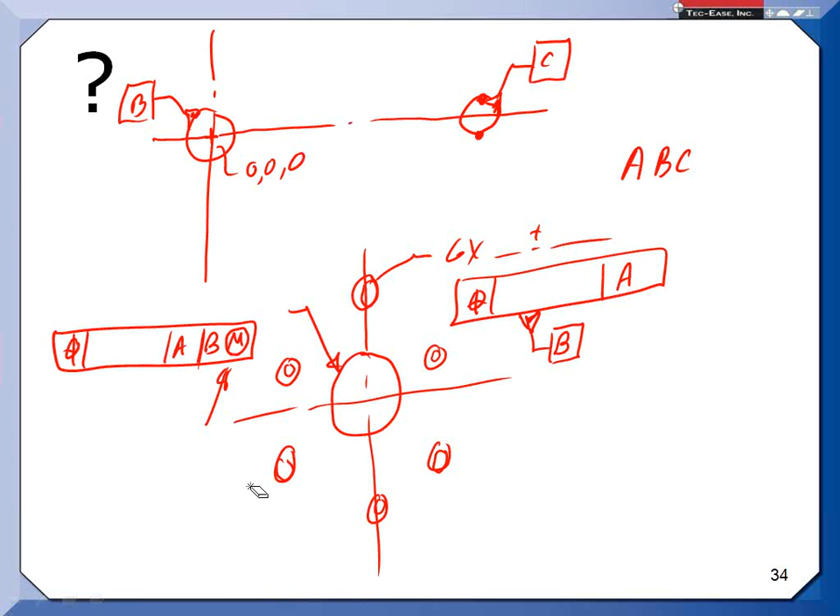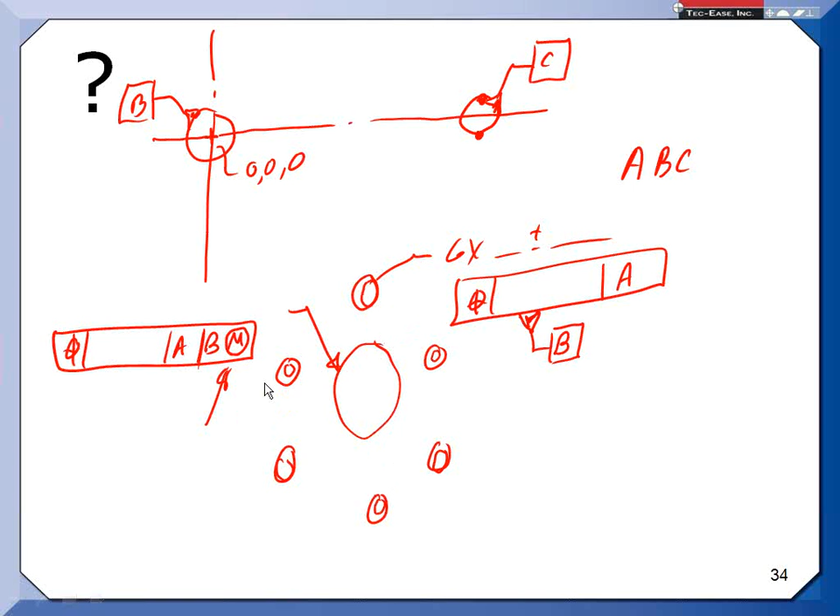Don, question. This is Rob. We have a question from a gentleman, Tungten Ozdemir, who does not have a microphone and sent a question in, basically referring back to the example on the cell phone cover. Okay. His question is, how would you define the same datum reference frame of the phone cover if you use the 1994 version of the standard instead?

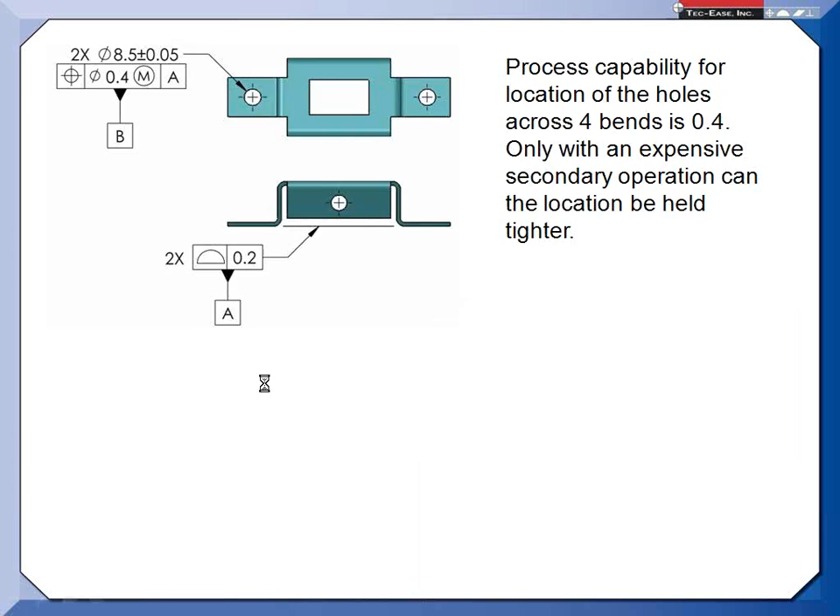And I took that to the committee when we were talking about customized datum reference frameworks and said, look, here's an example where I need it. And I don't know if my note is adequate. The English language doesn't serve us very well. So in the 1994 standard, we did not have a way to customize the datum reference framework. You could not violate datum precedence until 2009 unless you did it in a note describing what you were doing. You can always add a note, right? In section 3 of the standard, we say if the symbols aren't adequate, write a note. So once again, not a good answer, but the best one I can give.

Very good. I appreciate that. Thank you. Okay. Any other questions? All right. Well, we're near the end anyway. There's only about 8 minutes left.